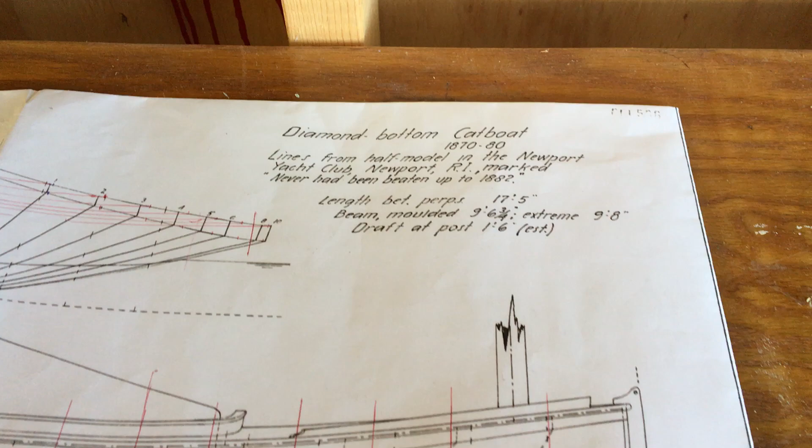We're out here in the carriage house looking at plans for a diamond bottom catboat. We're using these plans drawn by Howard Chapelle as a reference.

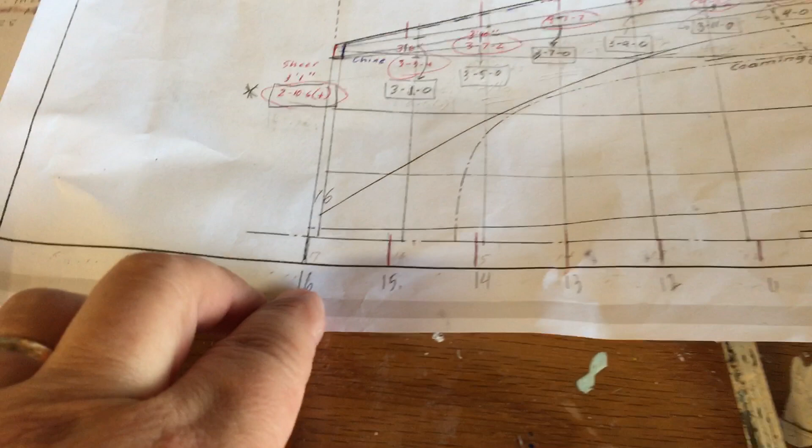These plans are for a 17-foot boat, and we're looking to do a 16-foot boat. So the first thing we needed to do was come down and change some of the scale on here for 16.

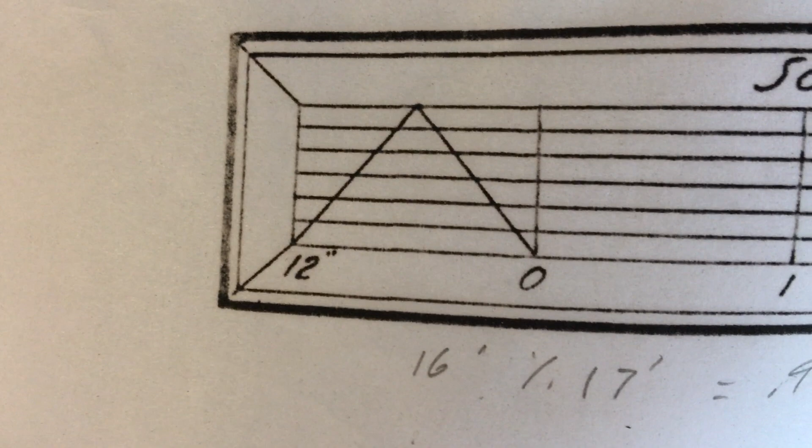This would normally be a 1 inch equals 1 foot scale, using this handy little scale here. Each little line going up and down is 1 inch, so you can figure your feet and inches, and then guess down to eighths. We're just trying to get a rough guess on things. So the scale still works, but the lines don't, so we redrew some lines today.

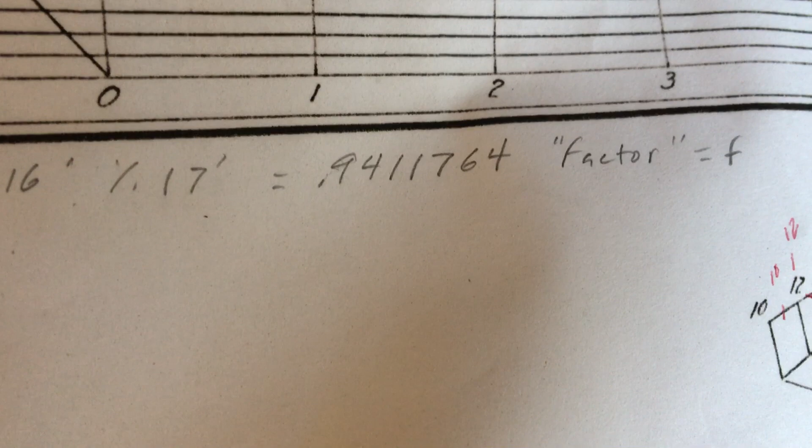We're having to scale to get 16 foot, scaling everything down by 0.94. In addition, this boat had over a 9 foot beam, so we're also scaling that down because I only want an 8 foot beam—there are some states where you can't tow your boat if it's more than that. But the catboat generality is the beam half the length, so about 8 foot ought to work for us.

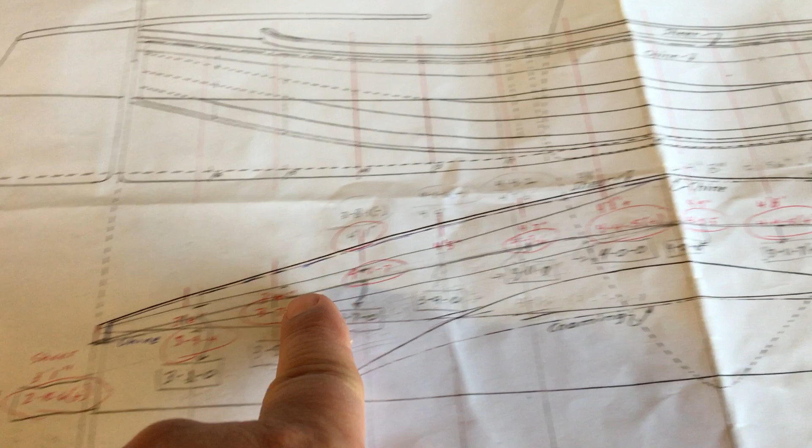So we're taking this as the new sheer we drew, trying to interpolate off of this older one. We took 4 or 5 different measurements off of that before we finally said, okay, this is how we need to do it—just draw the new line but use the scale off of the map. That works going this way.

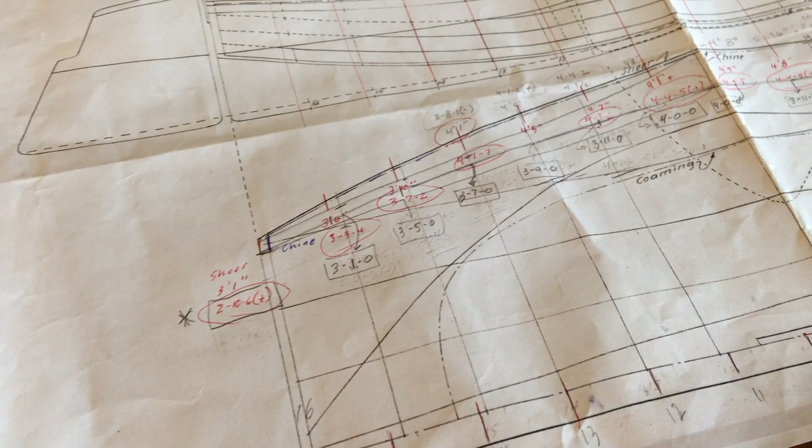We'll have to draw more, so we set our lines like 15, 16 off of what the other lines were. That all turned into laying out a baseline on the floor along where the floor planks, the 4x8 sheets of plywood, are lined up. We're calling them stations—every foot we put down a mark, for 3 feet all the way down to 16, and then we took the sheer measurements.

We gave ourselves about 3 inches for an inner stem, so that's why it doesn't come down to the edge—1.5 inches on either side.

Then we started every foot putting little screws in the floor, and bent this batten around it. Now we've got something that looks close to a sheer we'd see on a catboat—a little bit more body up front, then follows a curve, and the last couple of feet just straighten out and run all the way back.

It's going to give us a transom that's 2 feet 10 3/4 inches times 2—y'all do the math—so that's getting close to 6 feet wide.

So we'll draw the sheer line inside of that, and from those measurements we can start defining these shapes right here—on the transom, the sheer, the chine, down to the keel with that little bit there, then a center line—and we can actually cut the transom out based on that.

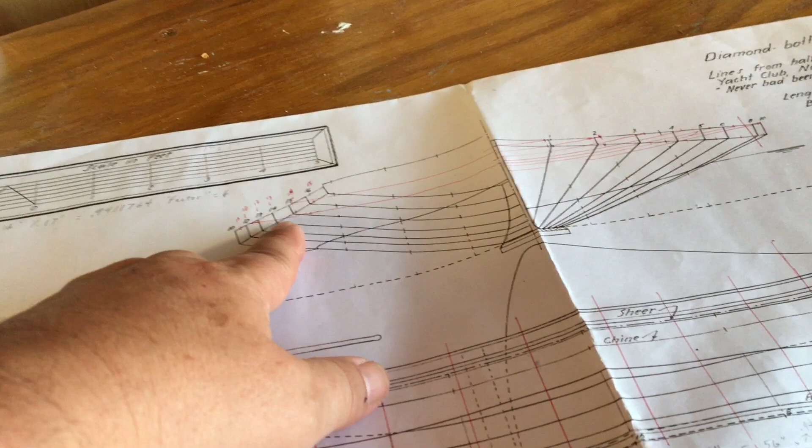Then we'll go cut every 3 or 4 feet or so—we're going to cut a mold, which is just a form that we can then bend the side around, and that's kind of what it'll look like. Sides very thin, and then the planks just running straight, or maybe just a little bit of a diagonal.

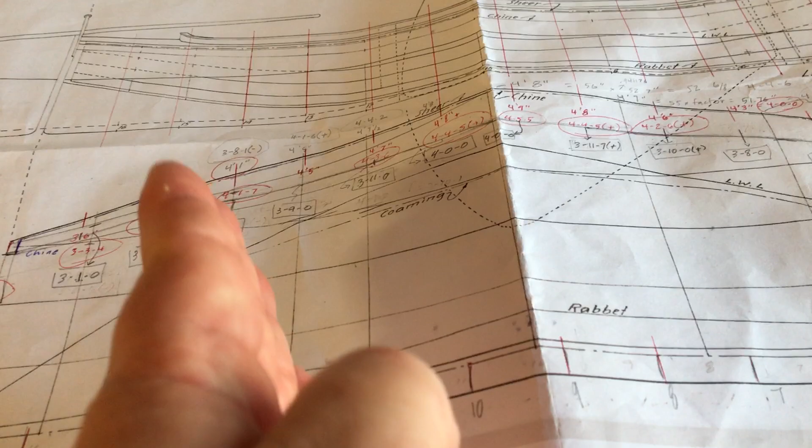It's going to be cross planked, so that's what makes this boat unusual. The builders could probably knock them out in a few days, bringing home scrap lumber from the lumber yard there in Pascagoula—the little short pieces there wasn't a whole lot of use for, so they could use those 4-foot pieces to plank the boat instead of needing a 16-foot long plank.

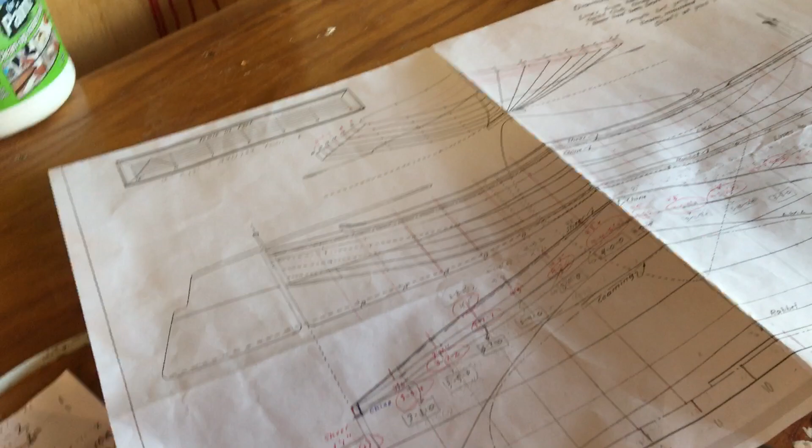So that's what we're working on.